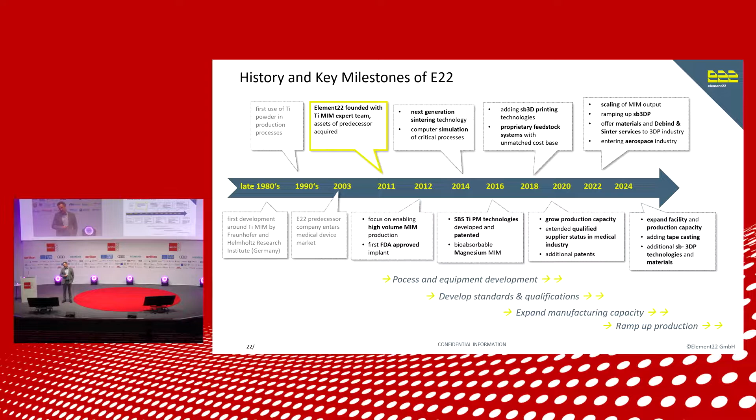Element22 was founded in 2011, which is 11 years ago. In the beginning years, as you can see, we focused on developing processes and equipment, and we had to do this in order to really industrialize the process. So we built a whole new system for debinding and sintering in order to scale to production. Then we started developing standards.

We developed qualifications with large OEMs, medical companies, and consumer product companies. We got our first FDA approval in 2012. I'm still today on the ASTM committee writing standards. Afterward, we expanded our manufacturing capacity and wanted to ramp up to production in 2020. That was delayed due to COVID, but we're now in the process of ramping up, and I'll give you a highlight on what quantities we're about to make.

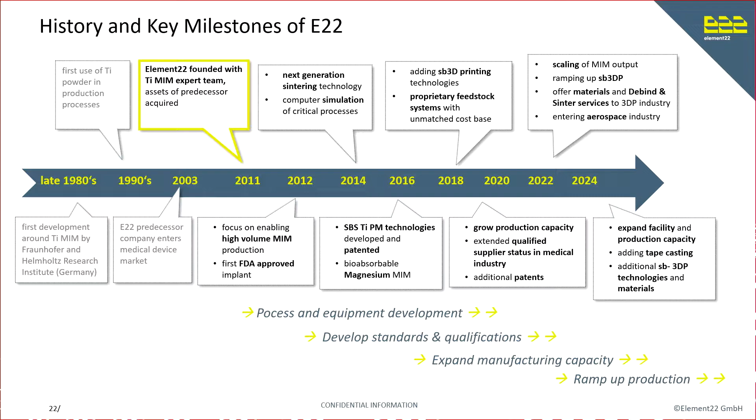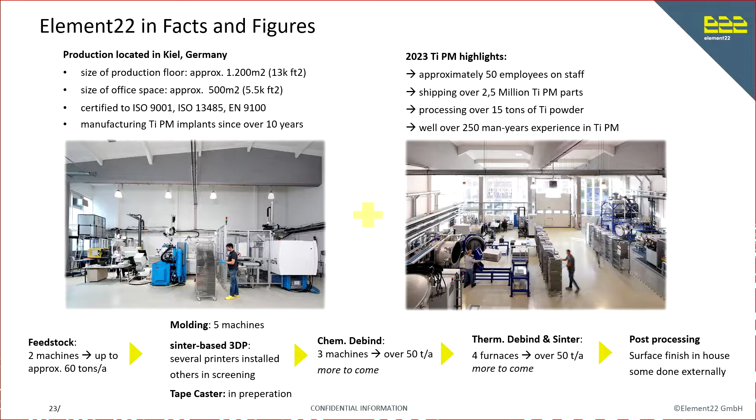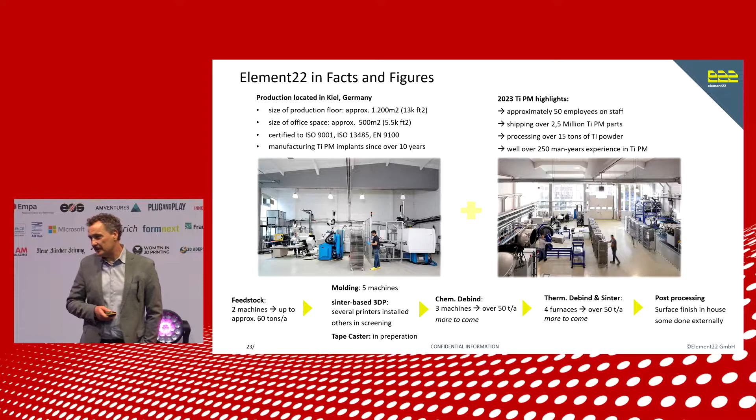Here you see how our plant looks. On the left, you see the molding area. On the right, you see where we debind and sinter. Some highlights: we're about 50 people, we'll be shipping about 2.5 million parts and components next year, and we will process about 15 tons of titanium powder. Our capacity is over 50 tons of finished product - that's what we have at the moment, and we are about to double the production space next year.

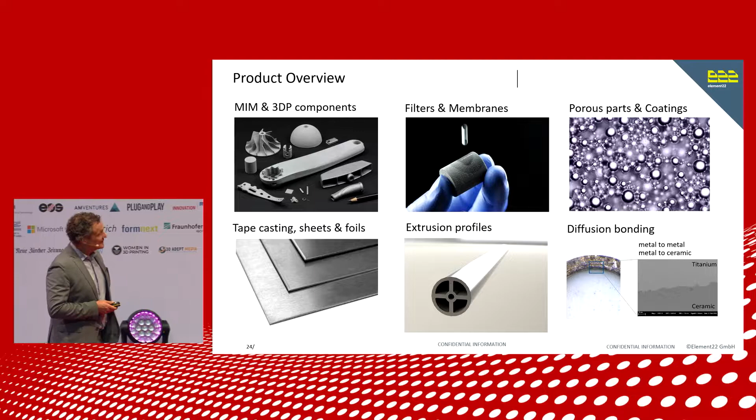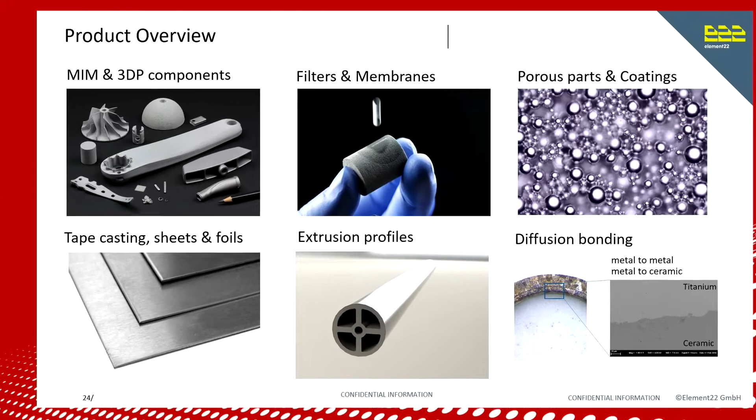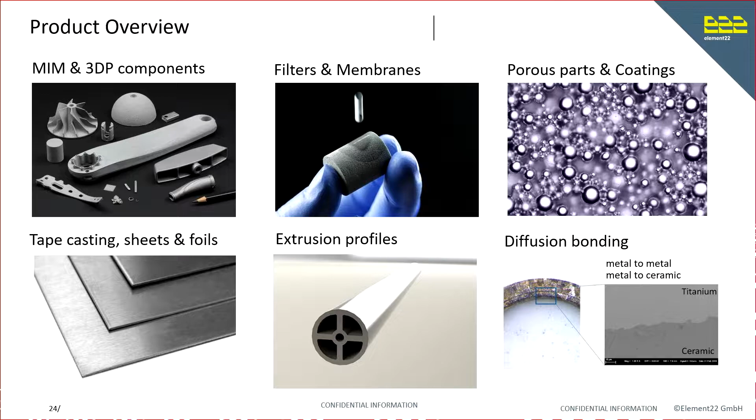So what do we do? Our main core business, you see on the top left, is manufacturing components for our customers. We make them via MIM and 3D printing, but we also manufacture filters, membranes, porous coatings, and porous structures. We manufacture tapes with different porosity, sheets, foils. We extrude profiles, and we also do more and more diffusion bonding, where we bond metal to metal and metal to ceramics for different applications.

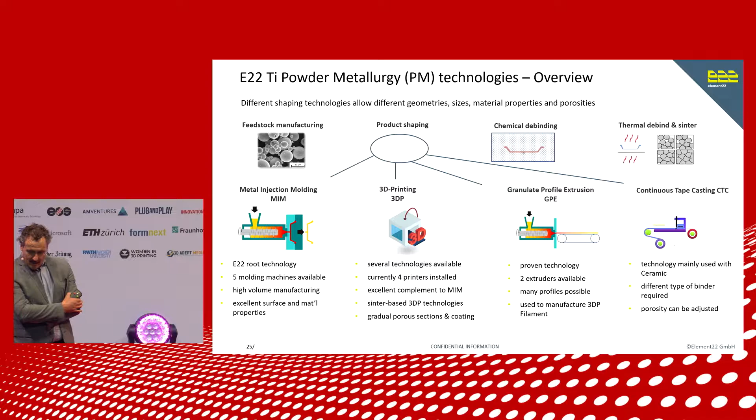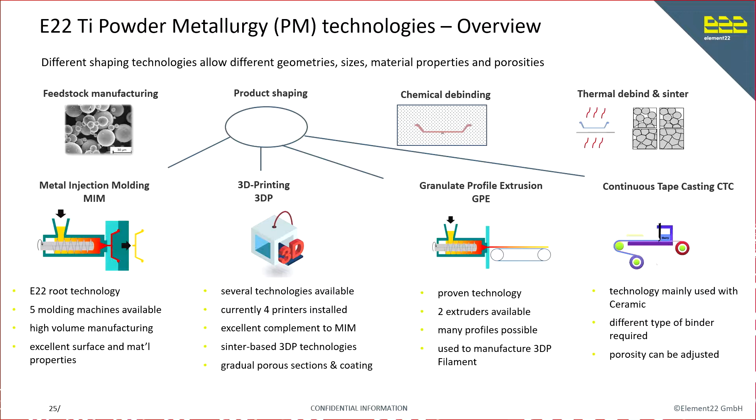So how does the process look? There are always 4 production steps for us. First, we manufacture feedstock, which is a mixture of binder and powder. Then we shape it, and we debind and sinter. The shaping processes we apply are molding, 3D printing, profile extrusion, and continuous casting. So for us, 3D printing is a shaping process - that's all it is for us. It's a process we use to manufacture products according to our customer expectations.

Why titanium? Titanium is the 9th most common material in Earth's crust. It has outstanding material properties when you do it right - excellent strength and density, corrosion resistance. But the perception that it's so expensive comes from the fact that it's not laid out for traditional manufacturing methods. So it's really a process you want to do net shape, and that's what we do.

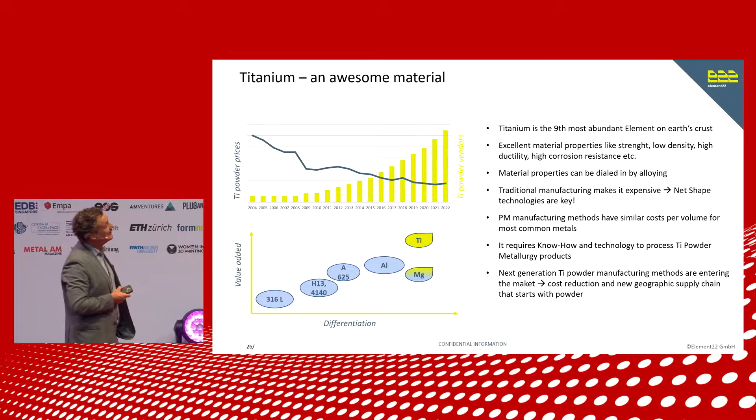Top left, you see the powder price, how it developed over the years, and how much powder is being manufactured. What's really exciting is the next generation powder manufacturing coming on the market - we actually have the first couple tons in-house, and it's super exciting because it starts from scratch. So it's not sponge that's then melted and then powder at the end - no, we're starting right from scratch. We make powder and then we manufacture product, so there will never be molten finished product.

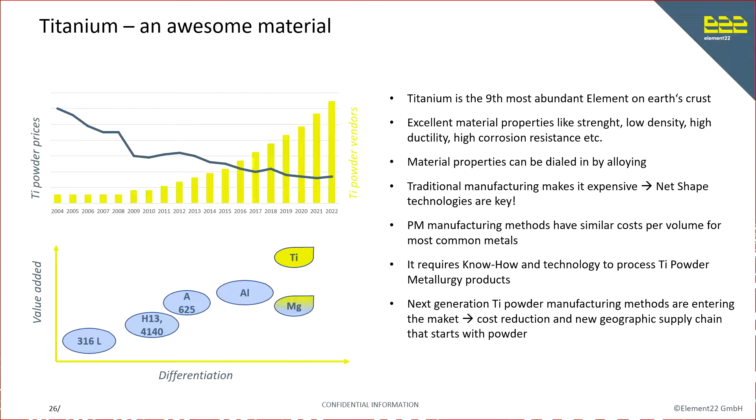So what's net shape? Most of you know. We shape the part according to what we want, so we have no material loss. In medical and aerospace, normally buy-to-fly ratio is 12:1. For us, we just shape the product without any material loss, so it's extremely sustainable and a clean technology.

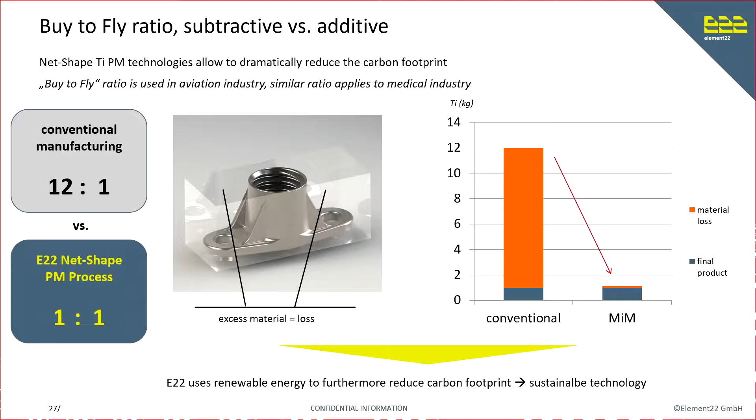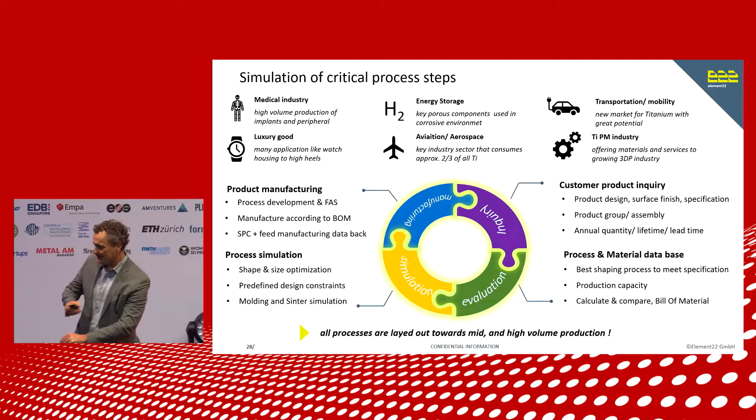So what do we do? Medical parts, we make implants, external components, lots of energy parts. Lots of parts for green hydrogen, where we make components for electrolyzers. It's a super fast-growing industry, and a big part of what we do.

We will print parts for thousands of bicycles next year, really thousands, over about 50 manufacturers. We make lots of luxury goods, from 3D printed heels to metal injection molded watch housings, and we have millions of parts in airplanes flying every day.

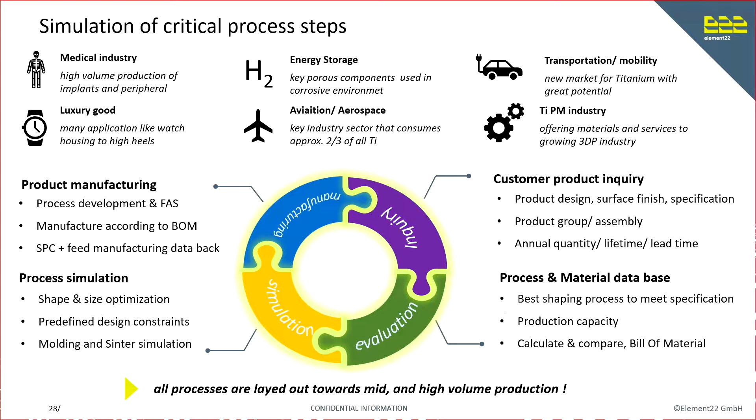So if you look at our processes, they're really complex when we get an inquiry. We are not a company that does prototyping. We want to do high volume manufacturing. So prototypes is not what we do. We do it in seldom cases for some customers, but it's not really what we want to do.

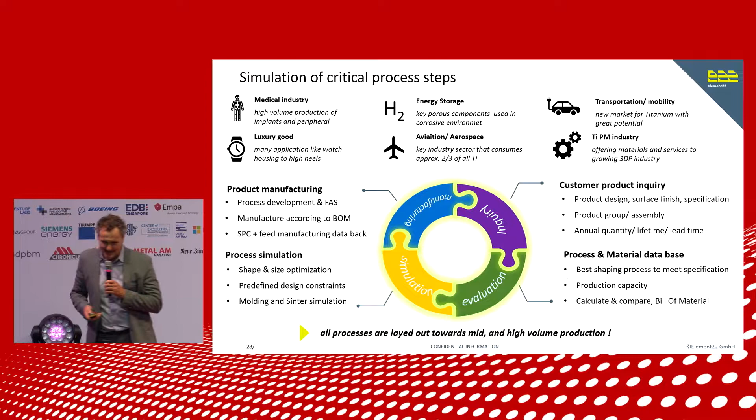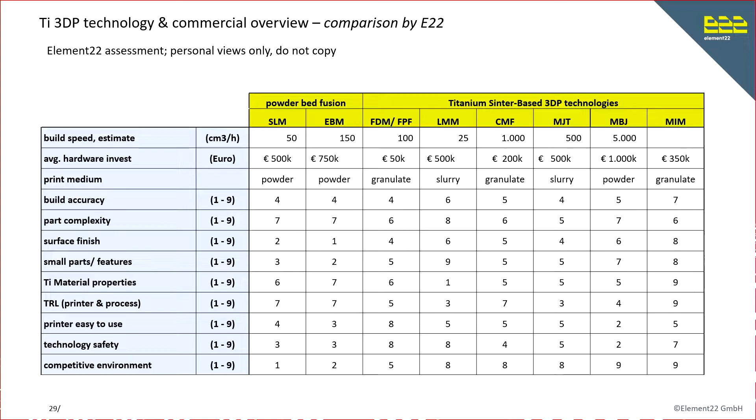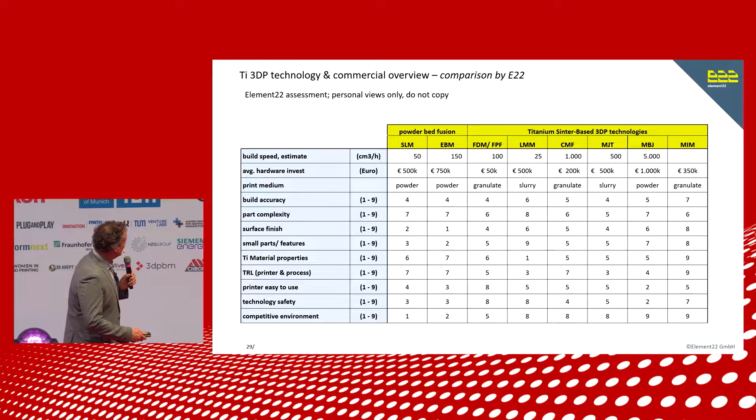We analyzed all the different technologies and picked some to start with, where we looked at how explosive it would be with titanium, the accuracy we can achieve, the surface finish we can get, and especially the technology readiness level. So here you get an overview of the material properties we can achieve.

On the left is the ASTM F1472, and right next to it you see what we can get with MIM, and you can see we surpass it quite nicely. Please don't forget, this is without HIPing. We don't HIP in-house, we don't need to, because we have a sintered product with a density of 99.8 to 99.9% after sintering.

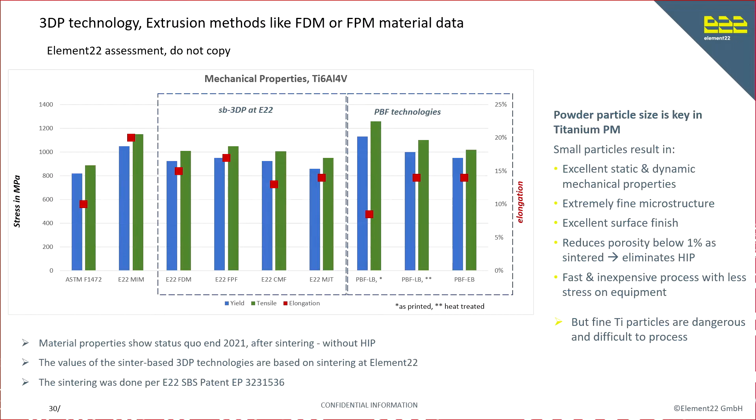On the right you see powder bed fusion, and in the middle the material properties we achieve with our 3D printing processes. You can see they all meet the ASTM standard, and they're comparable to powder bed fusion.

This is also a big part of why and how we pick the technologies we have in-house. For example, lithography printing is a really great process, but the binder system required to shape the parts doesn't result in the material properties we need for titanium. So it's important - we always want to work with very fine titanium particles in order to have good surface finish, good material structure and properties, and very low porosity.

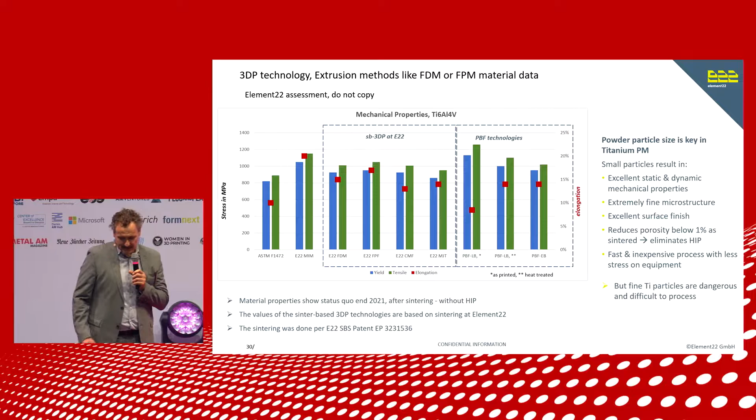So what do we have in-house at the moment? We do cold metal fusion, lots of cold metal fusion actually. But we also have extrusion processes in-house, which is an FDM and FPF printer - one working with filament, the other using pellets. And we are about ready to decide what binder jet system we will bring in-house as well.

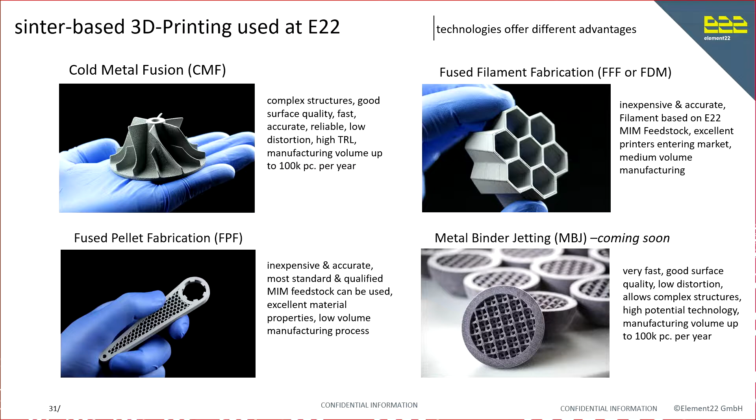And that's all I have. Thank you very much.

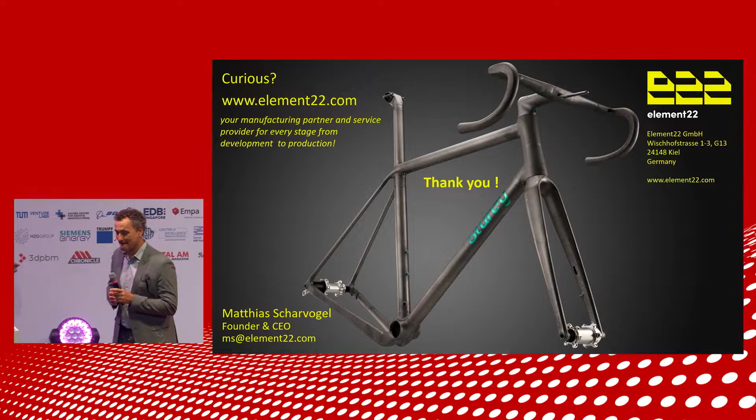Thank you, Matthias. Impressive presentation. Let me directly ask, what kind of bike is that? Can you tell us about that? It's my bike. It's your personal one? Yeah, it's my personal bike. Tom Sturdy built it, yeah. Okay, Tom was one of our first customers. But it's not the one that just won the world record in distance driving in an hour.

No, this is a titanium bike, and it gives you an idea of why it's so awesome. We are setting up our processes so that we'll be able to build a custom bike frame in titanium for the same price as a carbon frame from Asia. Incredible - that's where it's going, yeah.

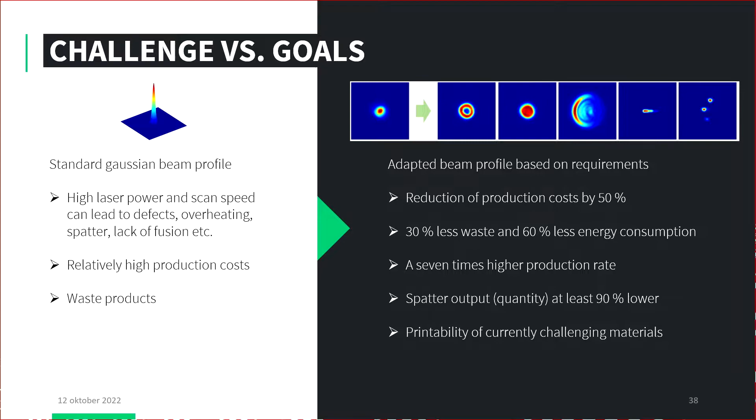The idea of the project is to adapt the beam profile based on the requirements that the application needs. So if you take the standard Gaussian beam profile, you can change it into either a ring mode or a bigger beam spot. You can also split up the laser beam.

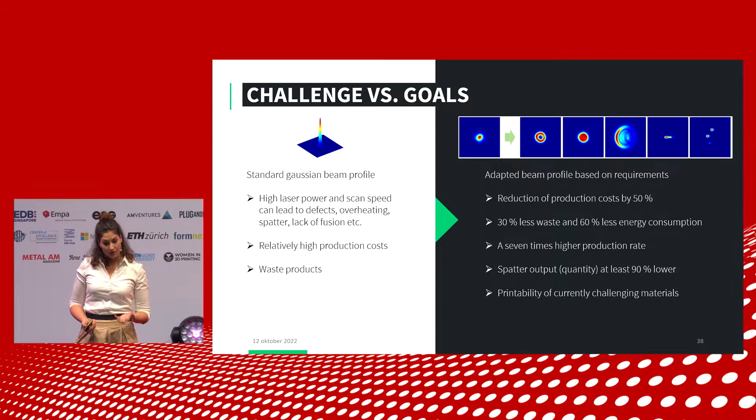By doing that, we hope we can reduce production costs, create less waste, and therefore less energy consumption is needed. We have a higher production rate, and we can maybe print more challenging materials that are currently not possible. So I will show two videos which show the currently used Gaussian beam profile.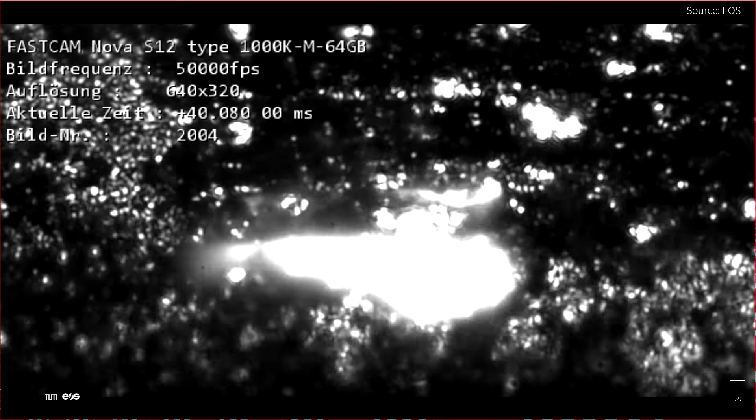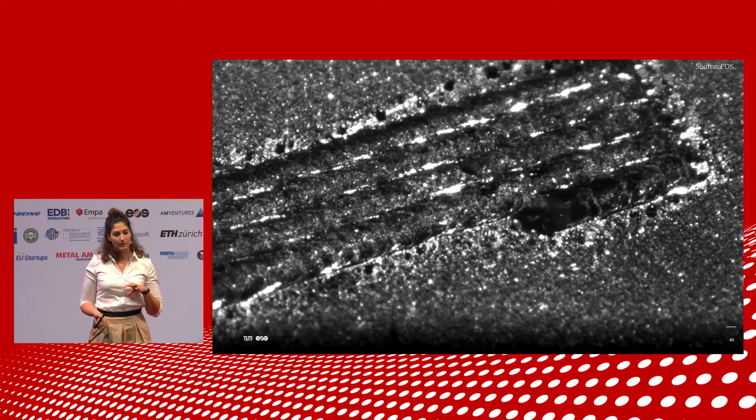What we can see here is that during the melting process, there is a lot of spatter created, which is flying around, and which we want to avoid. First initial trials have shown how it could look with an adapted beam profile - it was much smoother, it creates less spatter, and we can adapt it according to the application needs.

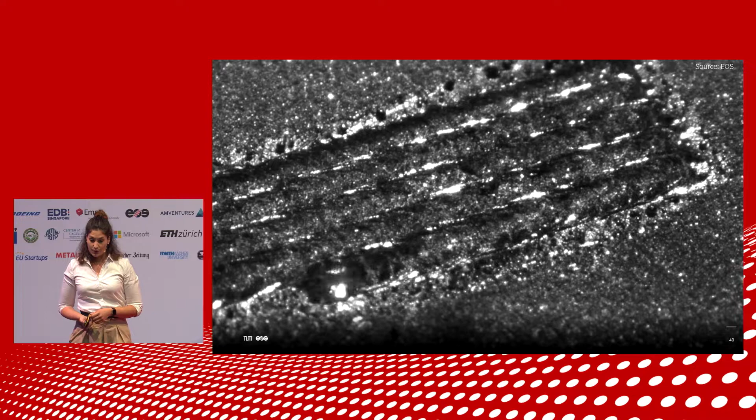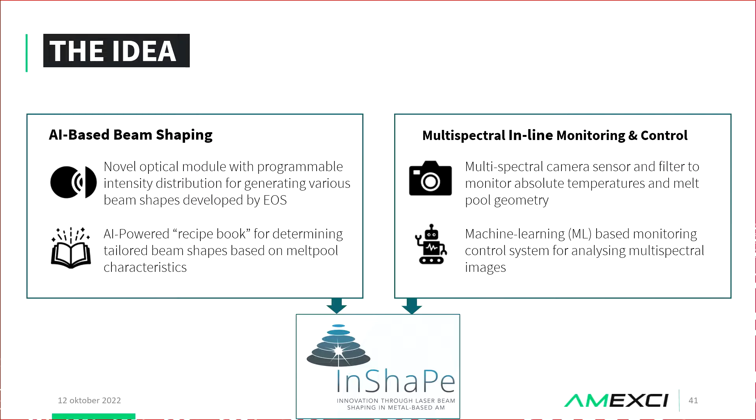So the idea of the project itself is to work with two pillars. One is AI-based beam shaping, where EOS is the company that will provide the technology, and we will work on a recipe book for tailored beam shapes that is also a learning process over time, and will develop itself.

And also we want to use multispectral inline monitoring and control to really have a machine learning based monitoring control for analyzing the results of the process itself.

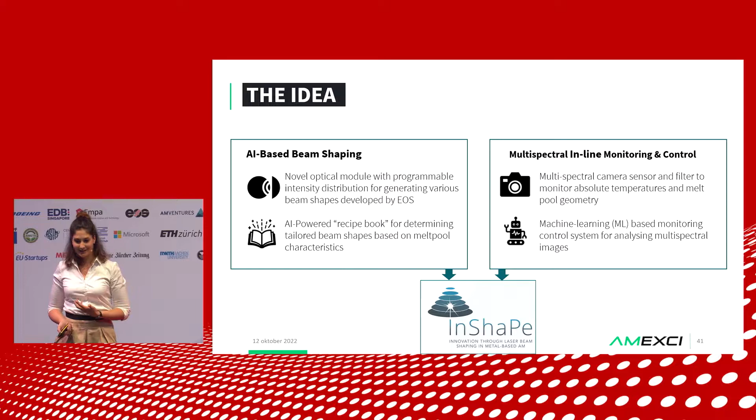And so why are we in this? We are very driven by our shareholders, and of course price is always one of the topics, and productivity. So we have chosen one application from one of our shareholders, which is a cylinder head.

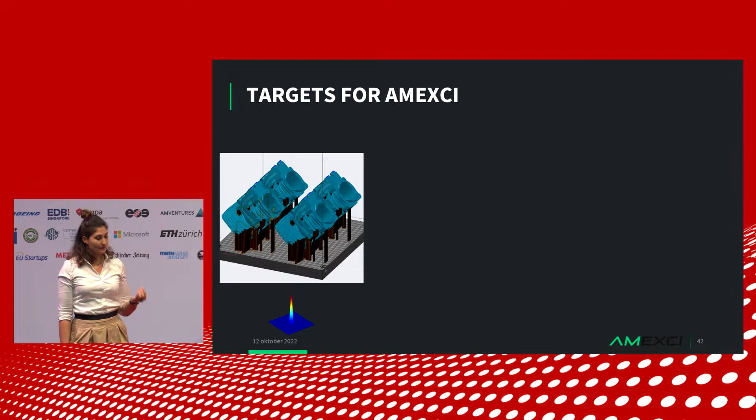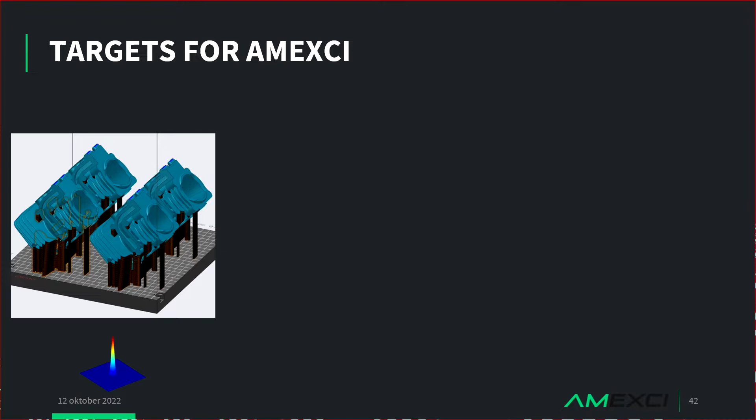Looking at what is today possible, we have a lot of supports - we can only place 4 of them in. Now we have done the calculation on an EOS machine, but we hope that with this technology we can stack them, achieve higher productivity, and therefore less waste.

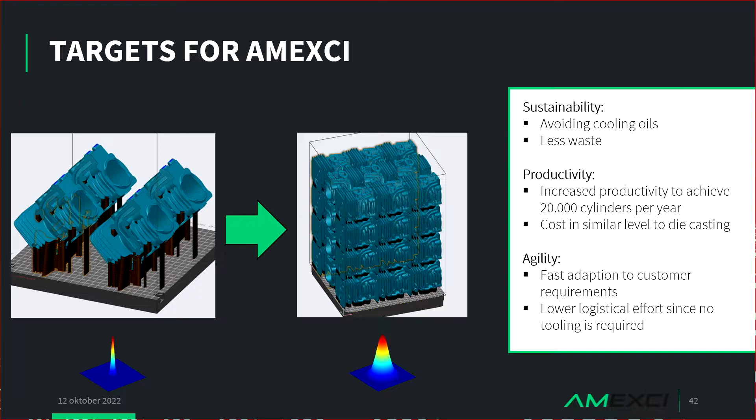And in the end we want to be competitive with die casting, which is the current manufacturing technology. Another advantage is that this would mean faster adaptation for customer needs, and also lower logistical efforts since no tooling is required.

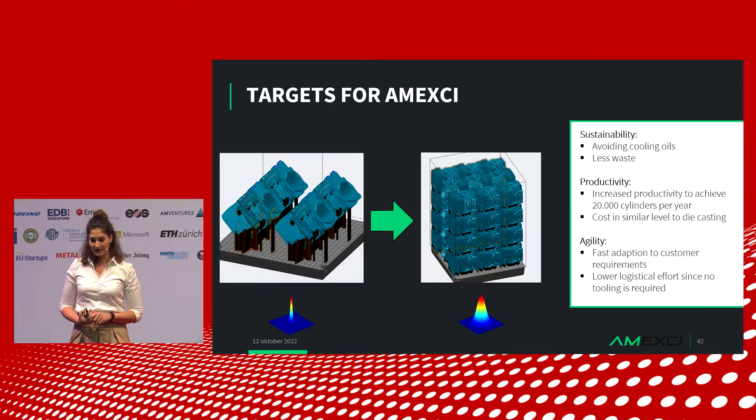So that's a very brief overview of the project itself and what we will work on for the next 3 years. Thank you very much for your attention.

What a professional timekeeping that was, Manja. Thank you so much. Awesome.

The first question I have, because when I looked at your webpage and you just presented it, it's incredible what amount of partners you have just by your shareholders. How much does that help in developing all the new technologies?

Yeah, I think it's a high driver for us in the end. I mean, they have the need and they challenge us to help them succeed.

So, a more technical question from someone who has no clue. When I've seen the two videos you just presented and you changed the beam profile, it occurred to me that the second one seemed to be slower. Is that the price you have to pay, or is the speed the same?

I think it's the start of the project, so it's just showcasing how different the melt pool will behave. I think speed is one of the things that will be worked on for the next couple of years. So the impression was correct - it was slightly slower, wasn't it? Okay, good to know that.

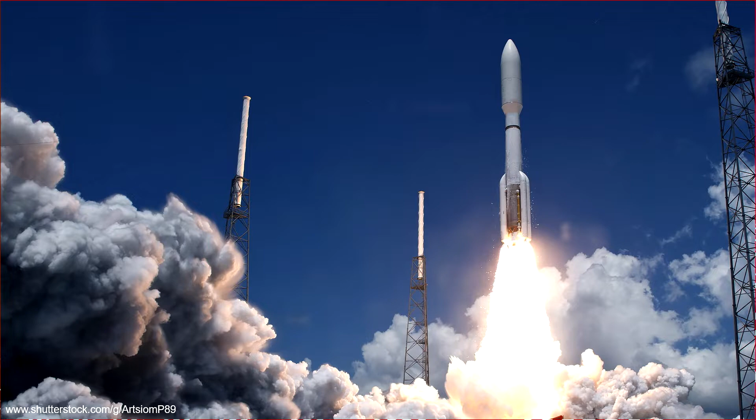I put a spotlight on one specific project, and as you can see from my first slide, it's about space. Did you know that in the last year, 146 rocket launches were conducted? In the year of a pandemic, that's an extraordinary high number. SpaceX and China are the drivers in this area. This year approximately the similar amount will be reached, but the predictions go into the exponential range.

So who is building all these rockets that are needed to bring people and satellites up into space? There are some very interesting approaches already. As you can see here, the company Launcher produced this rocket engine made out of copper. The combustion chamber and the nozzle, all produced by additive manufacturing, copper in laser powder bed fusion.

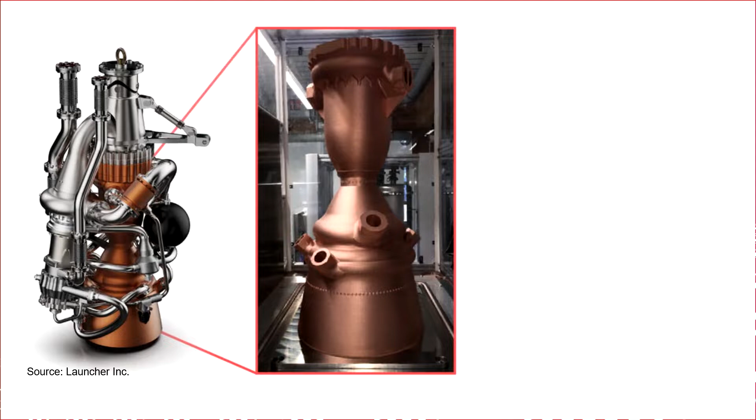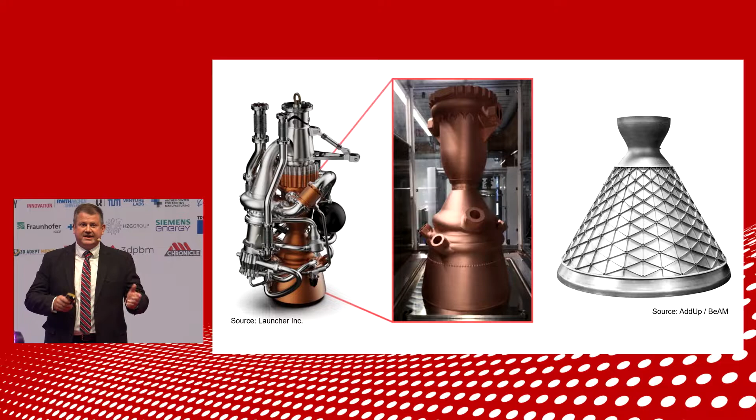Very innovative. Or here, the second part coming from BeAM, an AddUp company. Here you can see the sophisticated design with strengthening elements, and there are inside cooling channels that give the highest power to this nozzle. And that's where we start with our project.

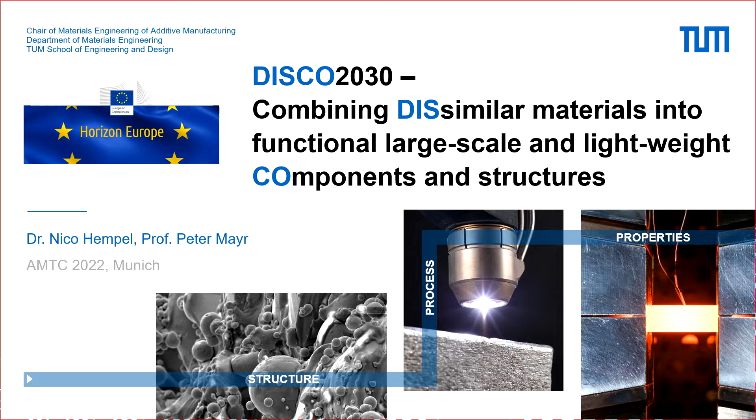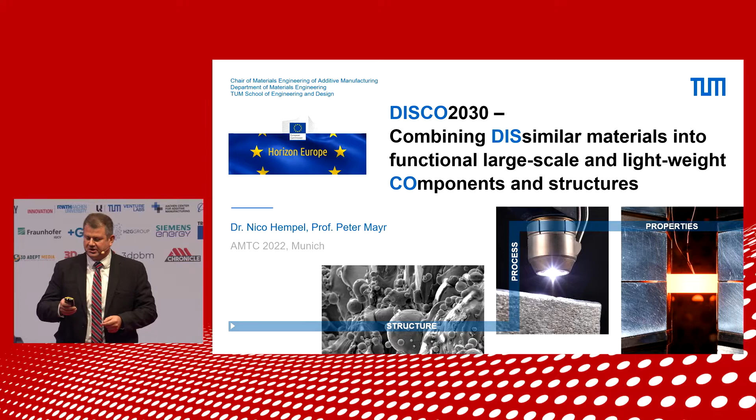The project has the very nice title, Disco 2030, because we want to rock the world until 2030 by combining dissimilar materials into functional, large-scale and lightweight components and structures. Nico Hempel at my institute is the project coordinator, and now I will guide you through what we are doing.

The motivation is with multi-material design, you can achieve a lot - the right material on the right spot. For example, if you have a hot spot and you place a highly conductive material there, you can eliminate the heat. Or you can give high strength to a special part that is stressed most.

So properties follow functions. And obviously at an AM conference, you know that additive manufacturing also has a lot of advantages. We can do near net shape or net shape manufacturing. The freedom of design is a wonderful tool for us engineers. The integration of function into parts helps in service, so the form follows function.

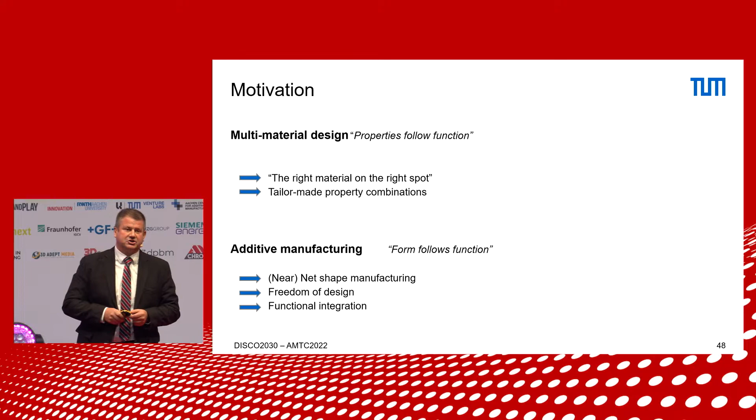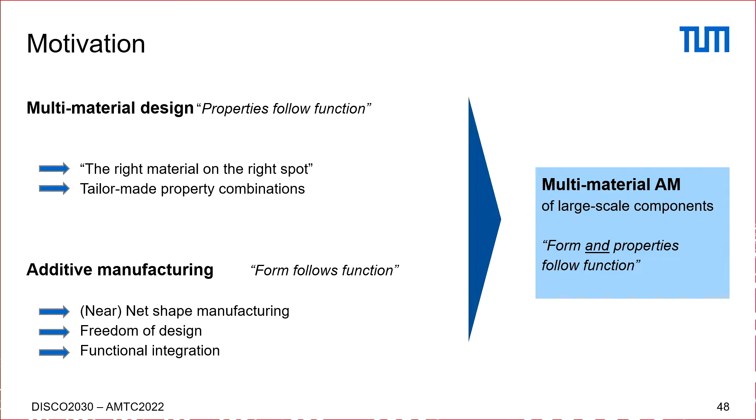Our idea was, why not combine both and do multi-material additive manufacturing of large-scale components? So in our project, form and properties follow function. So what are the main objectives in our project?

We have to develop hybrid manufacturing processes that are not available yet for dissimilar metal structures. We have to develop the same for dissimilar metal and polymer structures. These are really challenging tasks. We have to define design rules, testing and simulation procedures that qualify the process strategies.

The project I'm talking about is a high TRL level project. So at the end of the project, we will produce demonstrators for industrial use cases. And also, as this was a special call by the European Commission for resilience, to develop resilient companies, sustainability and circularity plays a big role.

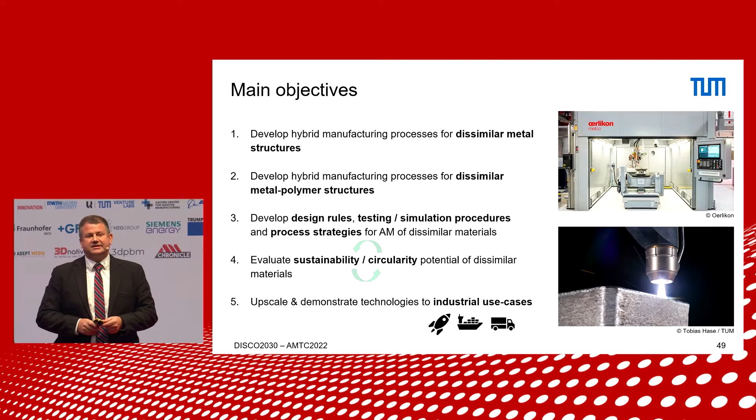It's not so easy if you have multi-material parts to guarantee circularity. How do you then disassemble the things? That's a big challenge. By the way, the project proposal was very successful because it was a very competitive call.

45 proposals were submitted, and out of these 45, only 4 are funded. We succeeded with the highest ranking possible, so we are very proud inside the consortium.

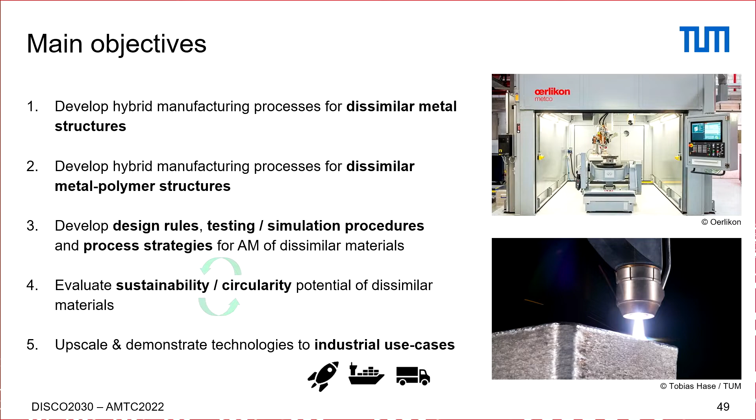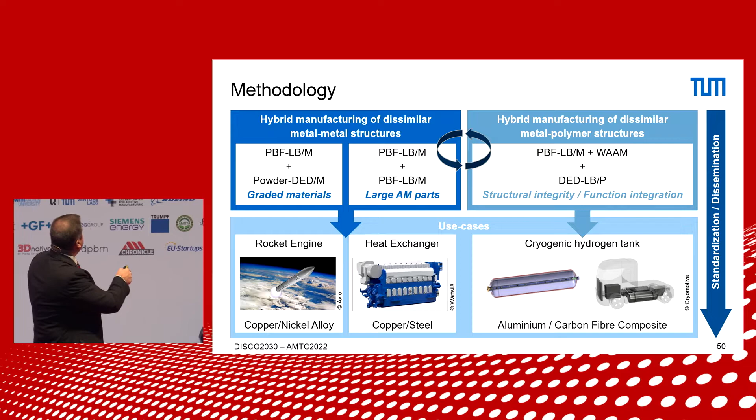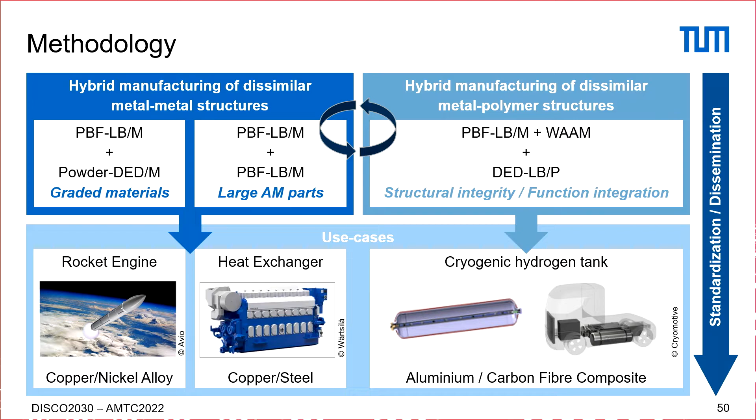So what are the methodologies we use? We use processes like laser powder bed fusion to produce metallic parts. If we look here, hybrid manufacturing of dissimilar metal structures, powder bed fusion technologies, but also DED processes using powder.

Therefore, we can guarantee to produce graded structures, so multi-material parts. The demonstrator for this section is the rocket engine. But we also produce parts, both laser powder bed fusion of one material and laser powder bed fusion of a second material, and then we merge it with innovative joining strategies.

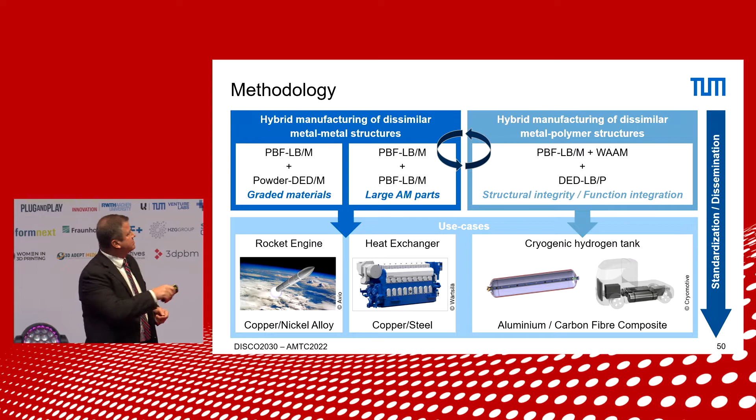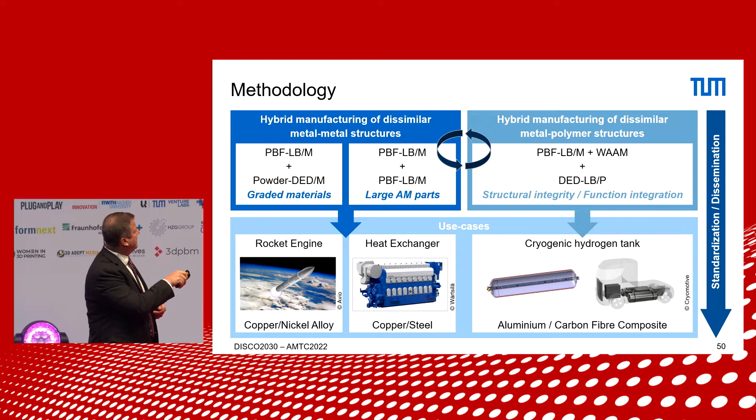There the demonstrator is this large combustion engine, where the heat exchanger is a combination of copper and steel. And for the hybrid manufacturing of metal and plastic or polymer structures, we use laser powder bed fusion for the metal part, and wire arc additive manufacturing also for the metal part. Then we use DED for the polymer structure, a very innovative technology by one of our project partners.

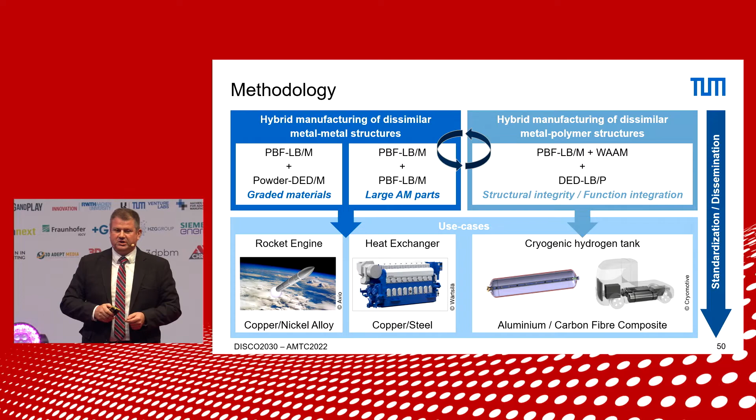And the showcase here is the cryogenic hydrogen tank, where the inliner is made out of aluminum to guarantee a diffusion-tight structure and to get higher strength. It is surrounded by a fiber-reinforced composite. So this is the methodology we use, and 9 partners with 1 mission.

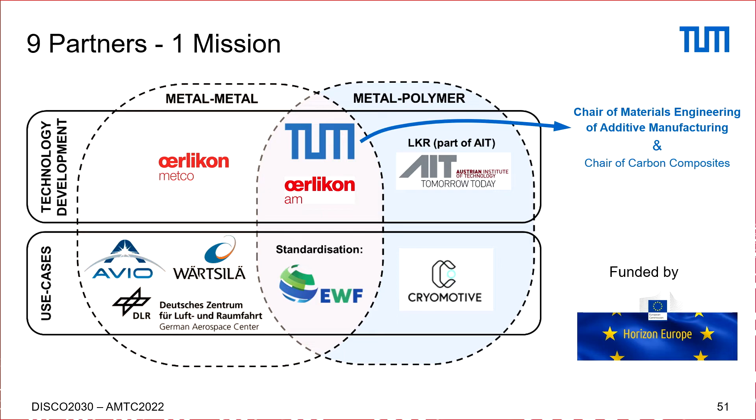I'd like to introduce you to the partners. On the technology development side, Oerlikon Metco, surface specialist, is taking part. On the metal polymer side, it's the Austrian Institute of Technology with their light metal section.

And bridging here is Oerlikon Additive Manufacturing as an additive manufacturing specialist, and TUM with 2 chairs: the chair of carbon composites, obviously for the tank structures, and my chair, materials engineering of additive manufacturing, also as a connector for both parts, but also the coordinator of the whole project action.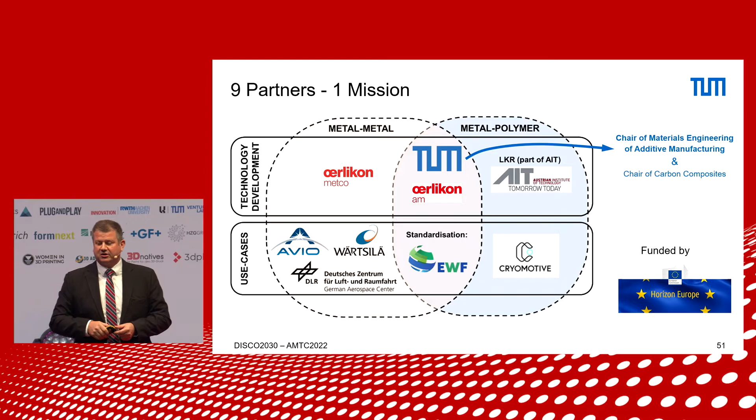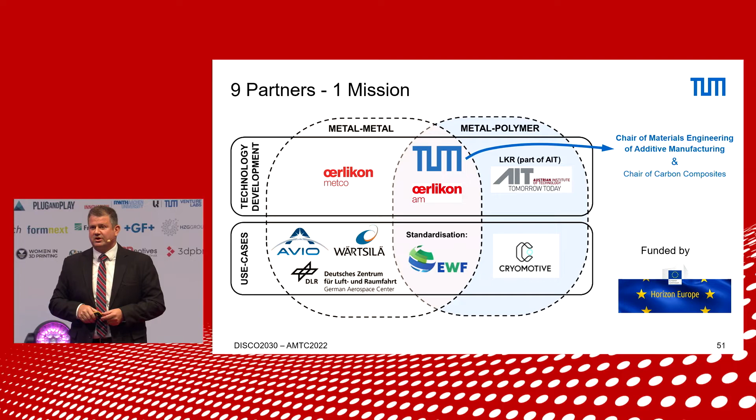For the use cases, we have different companies on board: Avio, the Italian space company, DLR, the German aerospace center, then Wärtsilä, a Finnish company, very interested and very productive in naval engineering, also having a strong focus on circularity.

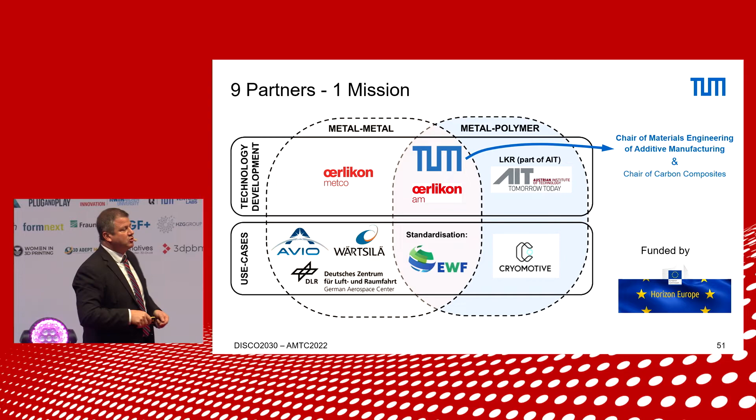For the metal polymer side, we have a very innovative startup, Cryomotive. They want to be the big player in the future of hydrogen-driven transportation. And we have the European Welding Federation, who supports us with their skills in standardization.

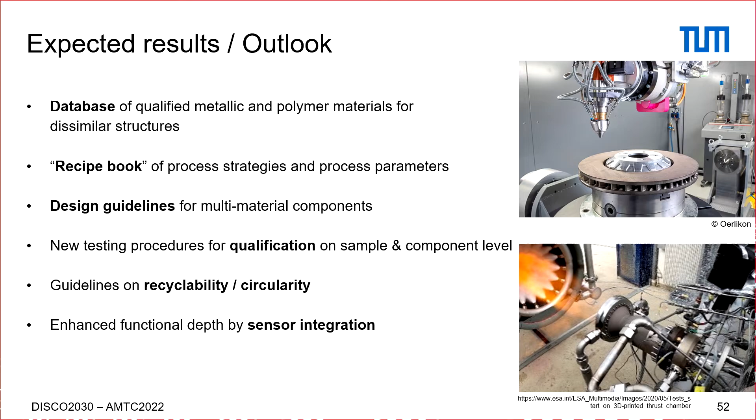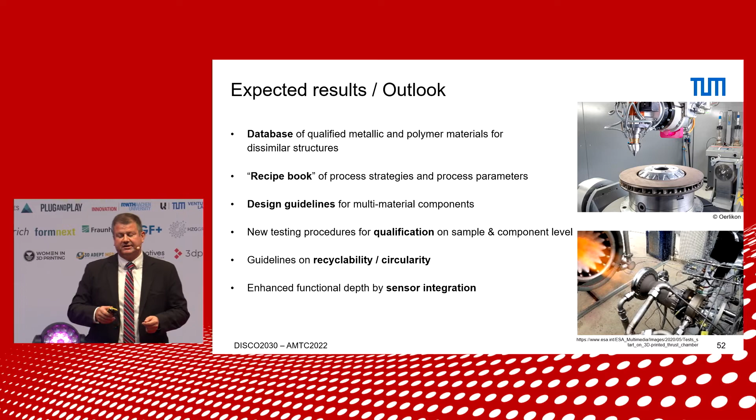As expected outcome results, we want to qualify a database for the metallic and polymer materials for these dissimilar structures. We want to develop a recipe book the users can use for the process strategies. We will develop guidelines as well as qualify our samples, but then also our final components on a large-scale level. We will develop guidelines for recycling and circularity and enhance the functional depth by sensor integration.

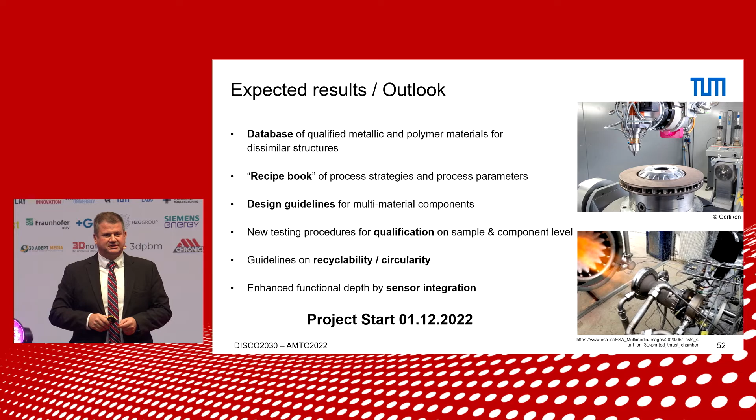The project start is December 1st this year. The project will go for 3 years, and for these 3 years we will have a budget of almost 7 million euro. I'm happy to report the next time to you what our progress is. Thank you very much for your kind attention.

Thank you so much, Peter. Quite amazing, because I remember how often we talked about the combination of materials, and especially in large formats, very impressive. There is one question from the audience that we are allowed to ask, so let me ask the first one.

Do you encounter or foresee issues and challenges at the interface of the various materials during operations for your multi-material objects? That would be one of my questions too. How do you go about these challenges?

Yeah, so definitely, that's one of the main challenges, and probably that's the reason why such products are not on the market yet. Because you have inhomogeneous material, you have a transition from one material to the other with completely different properties. Imagine soft copper, hard steel.

But with our technology, with the powder and plasma deposition, for example, we can achieve gradient structures, so to smoothen the transition. Or by our design methods, we can adapt the design to get the stress out of this susceptible region and put it somewhere else where it's not so critical. So this will be our approach, but definitely that's a big challenge. A lot to do, of course.

I'm really, really looking forward to your report about the success of this project, because I think it's super important to do so. Good luck for the future. Peter, it was a pleasure to have you. A big applause, Peter Mayr, thank you so much. Thank you very much.